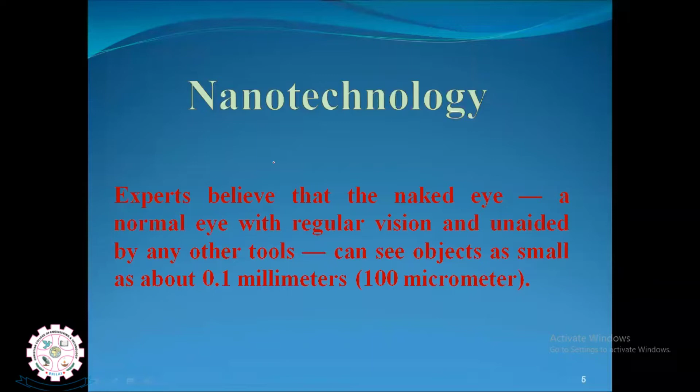We'll see the nanotechnology definitions. Nanoscience is the study of the phenomena and manipulation of materials at atomic, molecular, and macromolecular scales, where the properties differ significantly from those at a large scale. So we are manipulating material properties at these scales, where properties definitely differ compared to the large scale.

Nanotechnology is the design, characterization, production, and application of structures, devices, and systems by controlling shape and size at a nanometer scale. For any design or characterization of a product, structure, or device, we control the properties of that component by controlling its shape and size at the nanometer scale.

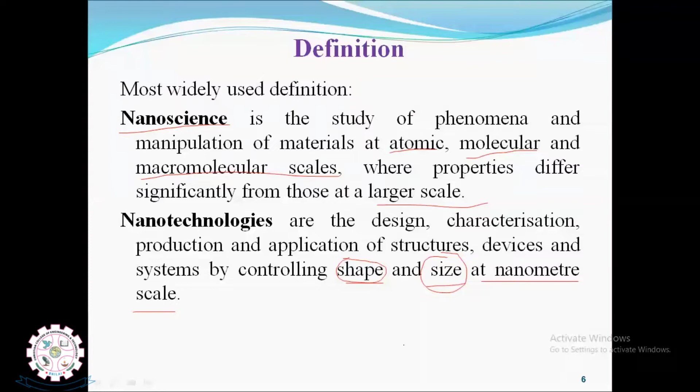So now we are able to improve the properties by double, triple, 4 times, or even 6 times. We can improve the component's properties or behavior as needed by changing the material at the macro to nano level, mainly through shape and size.

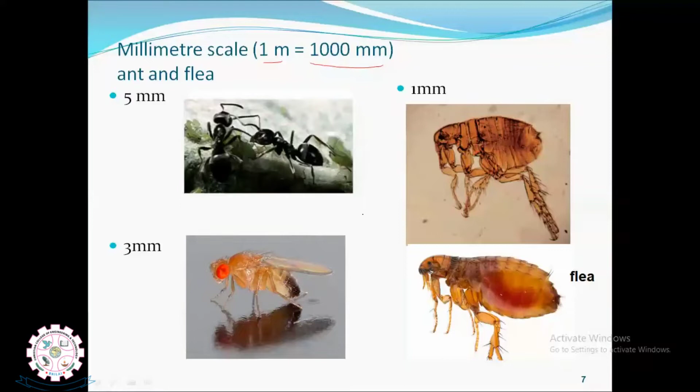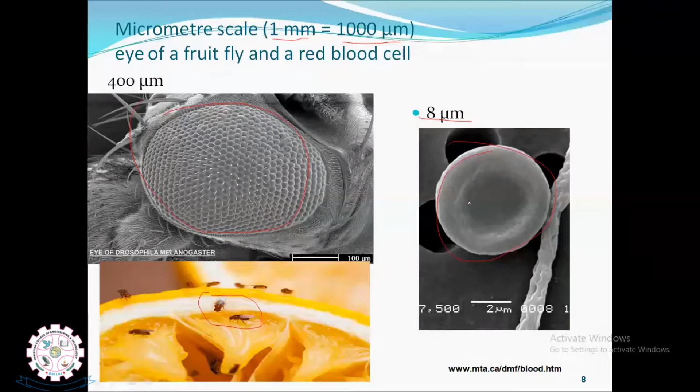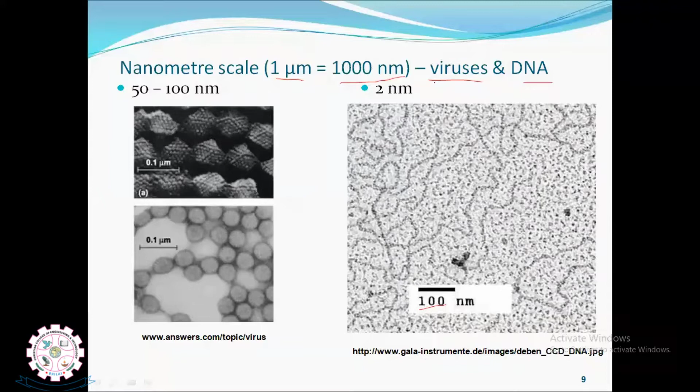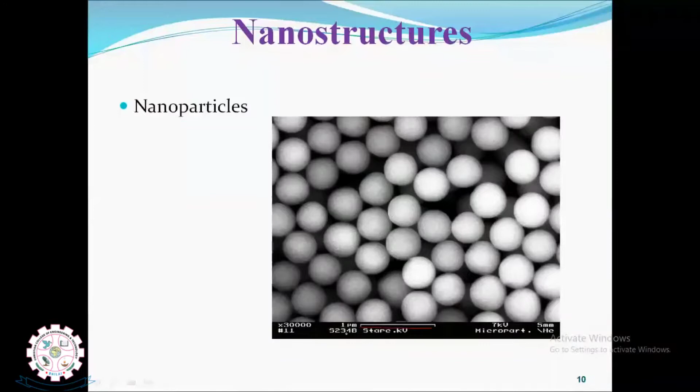These are some images of nanoparticles. Here, this dimension is 1 micron for the nanoparticle. We also know about carbon nanotubes and buckyballs, whose use is increasing a lot nowadays. These are some structures of carbon nanotubes and buckyballs.

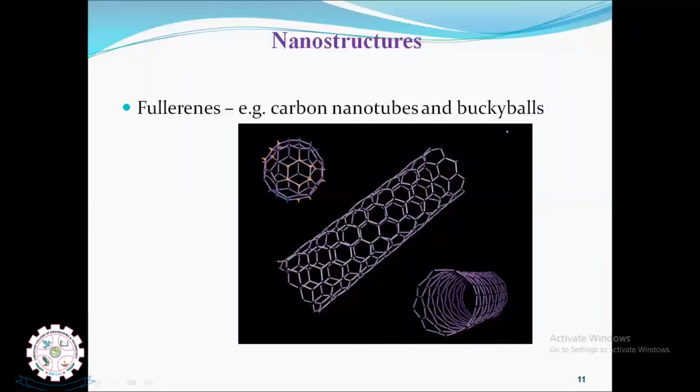For nanostructures, we know there are 1D, 2D, and 3D nanostructures. We are now able to develop these and use them especially in medical and bio applications. Recently, my brother's wife had an operation where they put a mesh inside the womb, a nanostructure type of mesh.

There were some problems, so to overcome them, they put the mesh inside the womb itself, and they said that after 1 or 2 months it would disappear automatically.

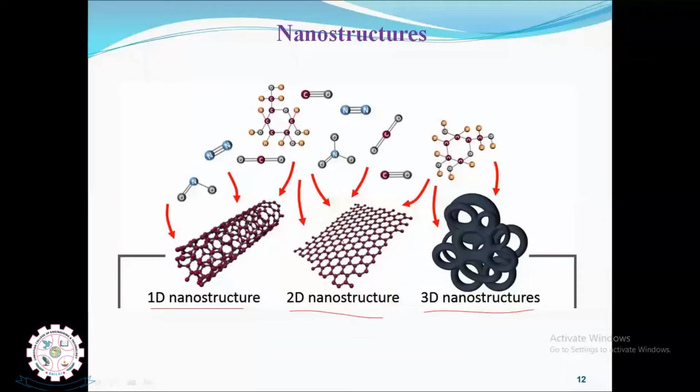So that will be decomposition into the blood, and through that blood only it will come out. So that medical applications, lot of medical applications in aerospace applications, even the automobile sectors also, we are using this nanostructures, carbon nanotubes, and nanowires, and biopolymers, and dendrimers. This all we are using in various applications, mostly in aerospace and medical applications.

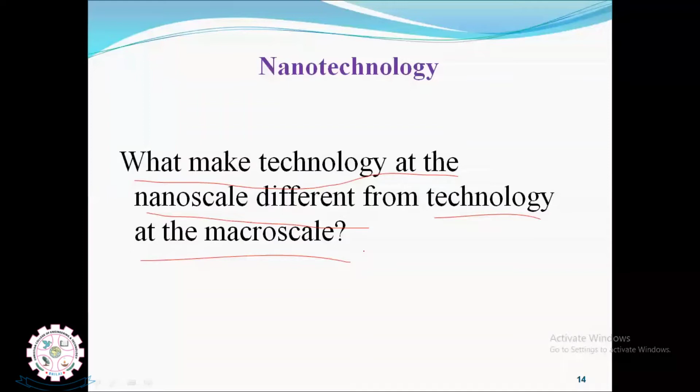So now what is nanotechnology? What makes the technology at the nanoscale differ from the technology at the macro scale? What difference can you observe in nanotechnology compared to macro scale technology? Macro scale means up to micro level, but now we are in the nanometer range. So we can observe what differences exist, that we'll see now.

Nanomaterials attract attention because of their unique physical, chemical, and mechanical properties that differ from those of bulk solids and molecules. Mechanical means tribological properties, corrosion properties come under chemical, and physical thermal properties also come under physical. All these properties of nanomaterials are unique, and they are completely different from macro level materials.

So nanomaterials exhibit distinct size dependent properties in the 1 to 100 nanometer range, where quantum phenomena are involved. What does this quantum phenomenon mean? When the particle radius approaches the asymptotic exciton Bohr radius, the influence of quantum confinement becomes apparent.

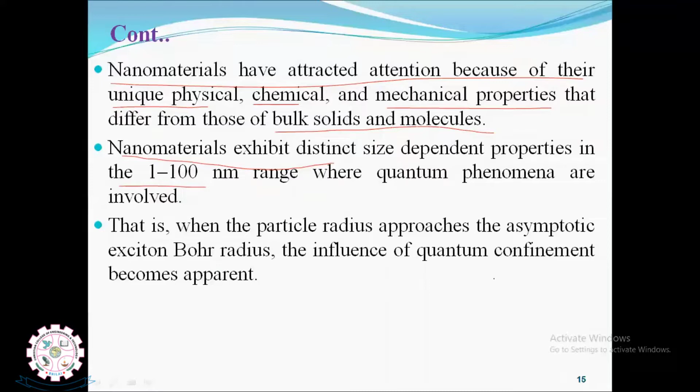Now, why is there a difference when you reduce the size of the particle? Especially in terms of strength, how does using the nanomaterial improve strength? The very large surface area of the nanomaterial is one of the reasons for their novel properties, and the high surface to volume ratio results in significant effects of the surface properties on their structures. This is the main reason, because we get a high surface to volume ratio.

Mainly the reason for the novel properties is that we get a high surface to volume ratio, resulting in significant effects of the surface properties on the structures, especially when using nanostructures. Because of that high surface to volume ratio, we get higher end properties.

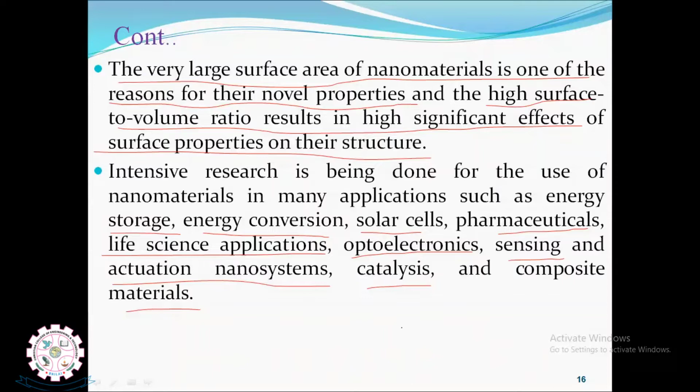Intensive research is being done for the use of nanomaterials in many applications such as energy storage, energy conversion, solar cells, pharmaceuticals, life science applications, optoelectronics, sensing and actuation nanosystems, catalysis, and composite materials. So lot of applications - we are using nanomaterials nowadays in many such areas.

The volume ratio, volume to surface ratio - for example, an object smaller in size has a much greater surface area to volume ratio. How can an object having smaller size have greater surface area to volume ratio? Let's see an example.

Take a 2 centimeter cube and a 10 centimeter cube. If you take the 2 centimeter cube, it has a surface area of 24 square centimeters and volume of 8 cubic centimeters. The ratio of surface area to volume is 24 by 8, that means 3:1. Now take the 10 centimeter cube: surface area 600 square centimeters, and volume 1000 cubic centimeters. Ratio is 0.6:1. So we get the highest surface area to volume ratio when reducing the size of the object, and because of this greater ratio, we get higher end properties.

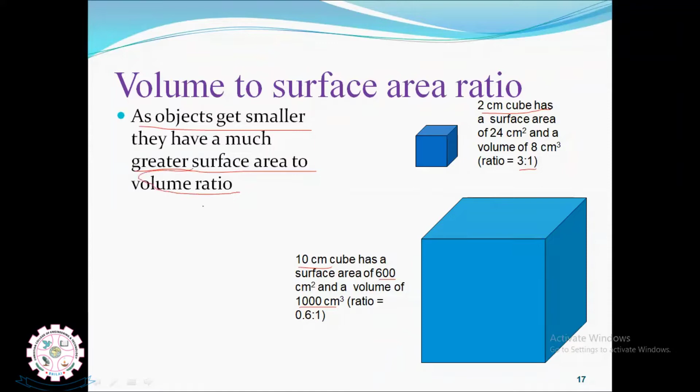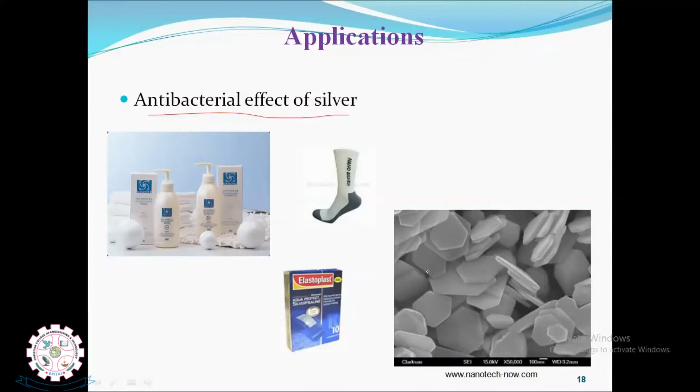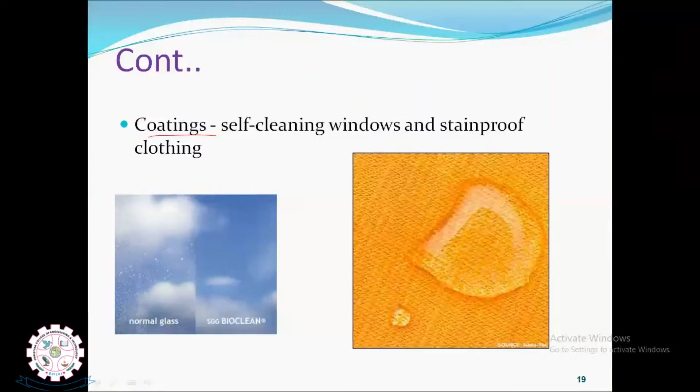You can see some applications: antibacterial effect of silver, some medical applications, and coatings. We use self-cleaning windows and stain-proof clothing with this coating, using nanomaterial coating, and microchips - we are developing microchips with the help of nanomaterials. Even our cell phone SIM cards, micro SIM cards, and sunscreens and cosmetics also use nanomaterials, and other applications like catalysts, food, nano remediation, paint, paper, cloths, filters, batteries, toothpaste, and cleaning products. Nanotechnology takes a place in many, many applications - we have it involved in almost every application.

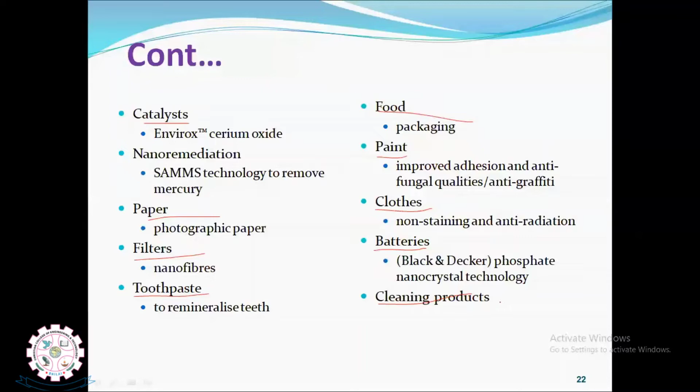Now we'll see the properties of the nanomaterials.

The practical application of engineering materials in manufacturing engineering depends upon the thorough knowledge of their particular properties under a wide range of conditions. Whatever material we want to use, we should know the behavior of the material under load, or under environmental conditions, or under external conditions - harsh environmental or chemical conditions, temperature conditions, and under external loads.

If we are able to understand properly the behavior of the material, then we can recommend that material for a particular application. So whatever the engineering application, if you want to use any material or fabricate it for any component, first we should know the behavior of the material under different conditions. This condition generally we call properties.

The term property is the qualitative or quantitative measure of the response of material to externally imposed conditions like forces and temperatures. So in terms of qualitative or quantitative measurement, we are measuring the response of the material under forces, external loads, temperature, and environmental conditions.

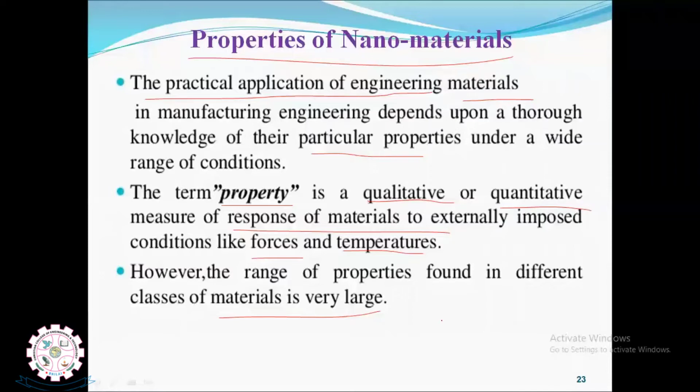When applying load, the detachment between grain bonding - bonding between atoms - may occur at low load as well. As you reduce grain size, grain boundaries increase, surface to volume ratio increases, and to detach that bonding we need to apply more load. So as you reduce the grain size of the material, you are directly improving the properties of the material.

So we know the classification of material properties. Under material properties, we know chemical properties, physical properties, mechanical properties, and dimensional properties. We'll focus on the mechanical properties.

Since the topic is mechanical behavior of the nanomaterial, chemical properties are also very important, physical properties are also very important, and dimensional size and shape are also very important. Mechanical properties are very important since we are working on materials developed for various applications - mostly strength, hardness, toughness, stiffness, elastic and plastic property, ductility, brittleness, hardness. We have to analyze all this much more for various applications.

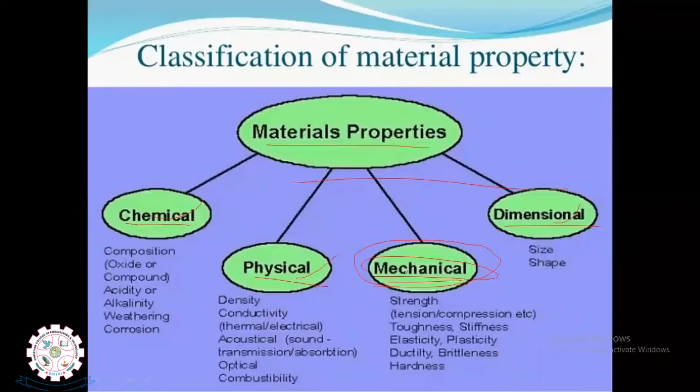So mechanical properties - the properties of material that determine its behavior under applied forces - are known as mechanical properties. At various applied external forces, the behavior of the material under external forces only, we can say, is mechanical properties.

We know that they're usually related to the elastic and plastic behavior of the material. Material may undergo elastic behavior or plastic behavior under load. These properties express the functions of stress and strain.

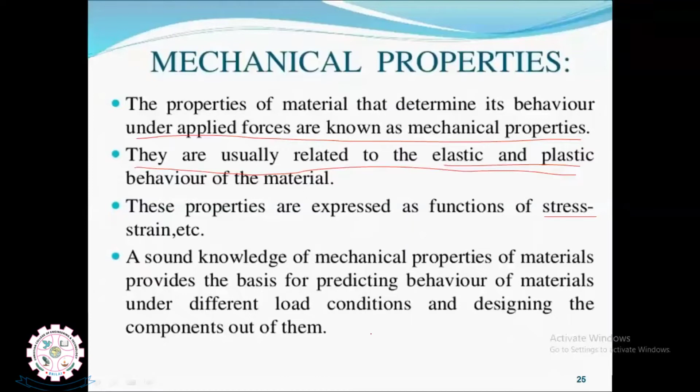A sound knowledge of mechanical properties of material provides the basis for predicting the behavior of the material under different load conditions and designing components out of them. If we have very good knowledge of the mechanical behavior of the material under various conditions and loads, then you can design or recommend that material for whatever applications.

So mainly stress and strain. Experience shows that a material subjected to load may either deform, yield, or break, depending upon the magnitude of the load, the nature of the material, and the cross-section dimensions. These are the main three effects on how material will behave under external loads and forces.

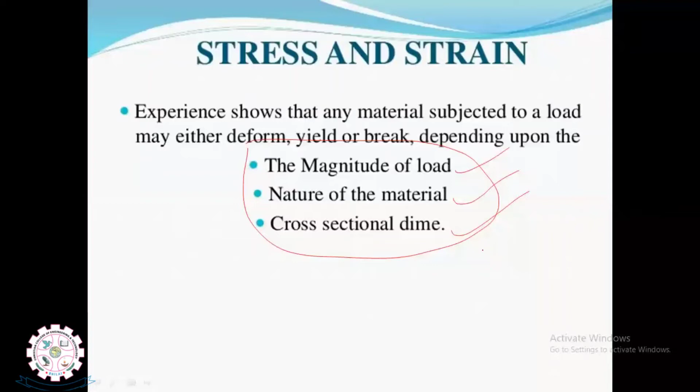If you see the length scale wise material behavior, take meters, millimeters, microns, and nanometers. The behavior under load means how defects and cracks form, how material will break. We take jet engines as an example, 1 meter macro structure, down to 10 power minus 2 to 1 meter, that behavior of the material. When you analyze at this range, you can understand the different nature of that material.

When you come to microns, here you can see the micro machines. If you analyze the material at a micron level, then you will get a different idea, and if you analyze at nanometers, you will get a different idea again.

You can see the crack in the human teeth at 1 micron. Generally we won't observe this type of crack. Even with jet engines, if micro cracks occur, that leads to huge damage. These micro cracks generally cannot be observed by the naked eye. With the help of SEM analysis or optical images, we are able to observe the micro cracks.

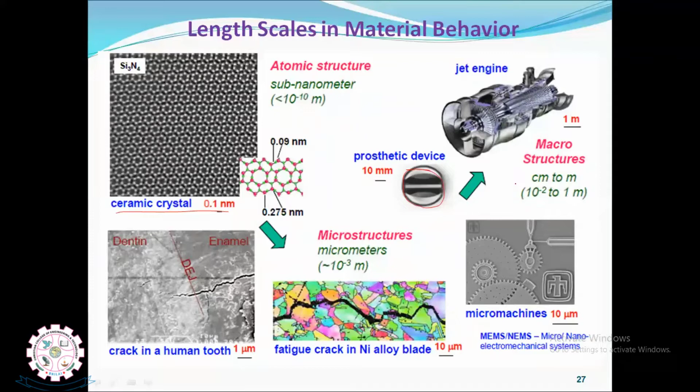How does material get failed? We know that it can be by plastic deformation or yielding, by fracture, by fatigue, by environmental conditions, by corrosion, or by wear surface damages.

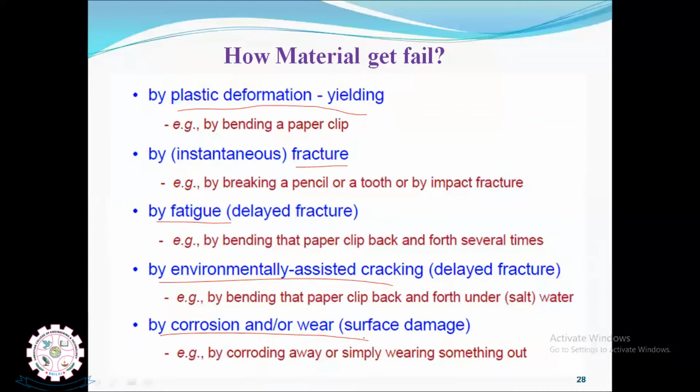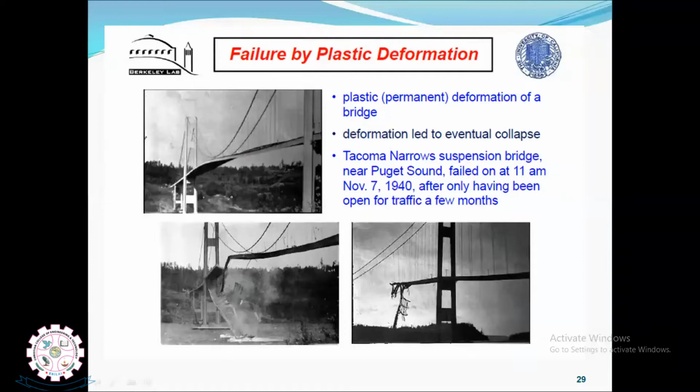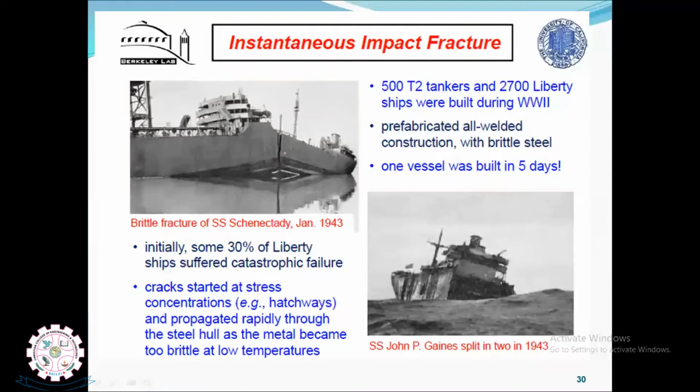We can see failure by plastic deformation. Because of plastic deformation, bridges may collapse. And under impact load, the T2 tankers and 2700 Liberty ships built during the Second World War also suffered breakage because of the impact factor, sudden load. If the material is not able to withstand the impact load, then sudden break factors lead to huge damage.

At the same time, fatigue fracture: the de Havilland, the first commercial jet aircraft, had 5 major crashes in the 1952-54 period, caused by fatigue cracks initiated at the square windows. That's why now you can see flights only use oval shaped windows.

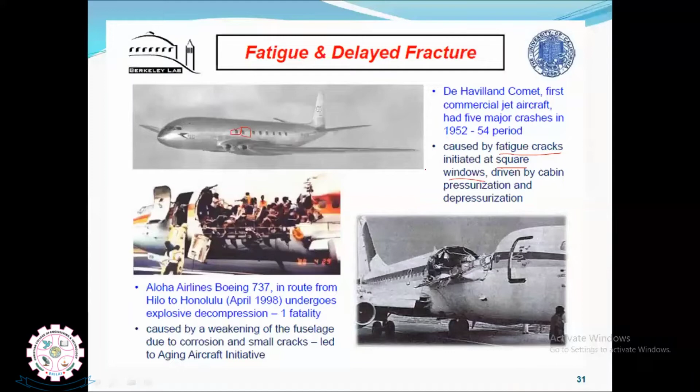So with fatigue load, if we are not able to design properly, if we are not able to use the proper material for the particular external force acting, then it may start as a small crack or small damage, but it leads to huge failure.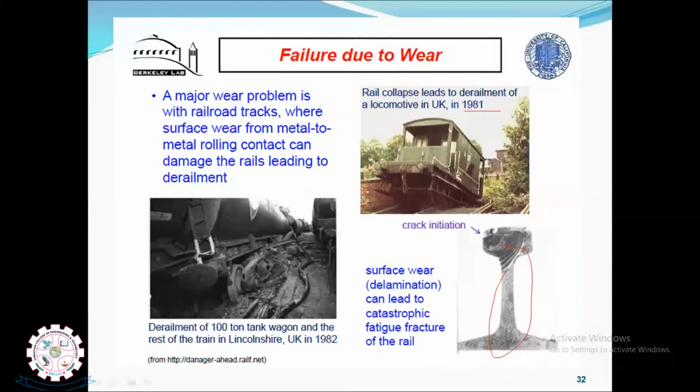So if you understand how material will behave under different loads, how material will fracture or fail under different conditions, you can analyze and overcome these difficulties. We can try to overcome them with the help of nanotechnology, maybe coating, nano coating.

For example, in rail we cannot use high wear resistant material because iron is the economical material available. If you want to use ceramic, titanium, or platinum, which are high wear resistant materials, the cost is very high. You cannot invest that much and put the rails.

So iron is the economical material we use. With the help of nanotechnology, to improve wear resistance and surface property, we are able to apply coating with nanomaterial, and the coating cost is very low. That's why nanotechnology is now a very useful tool to overcome these problems. Instead of increasing cost, with nanotechnology we are reducing the cost, staying at an economical level while overcoming all the problems.

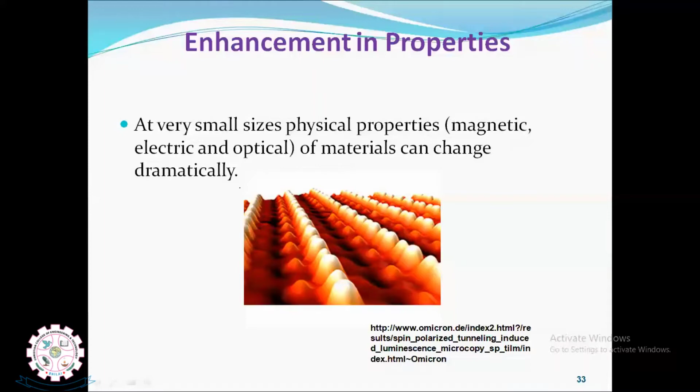At a very small size, physical and other properties of the material can change dramatically. Nanomaterial can be used to improve or change the properties of some products, alloys, and composite materials.

For example, in aluminum composite, when you add silicon carbide particles at macro level, micro level, or nano level into aluminum, compared to the base aluminum material, there is definitely some enhancement in properties. But when you compare macro particles and nanoparticles...

Many researchers have already published papers stating that when they added nanoparticles into aluminum composite material, the properties of aluminum enhanced more compared to when they added micro particles.

For example, in the work by Y. Şahin and K.E. Öksüz, they published a paper on the effect of aluminum oxide nanopowder on the wear behavior of nickel titanium shape memory alloys. They prepared the nickel titanium based shape memory alloy and developed a composite material using Al2O3 aluminum oxide nanoparticles by powder metallurgy method.

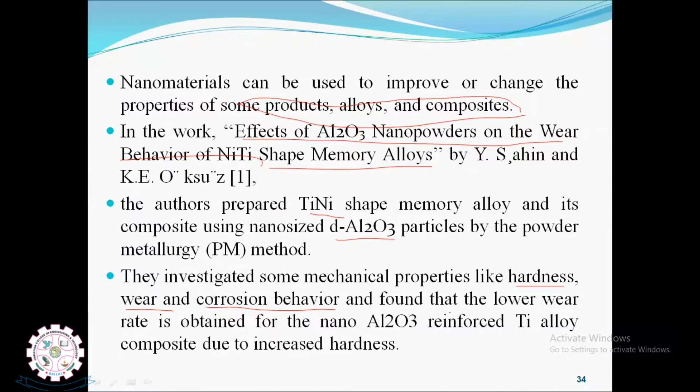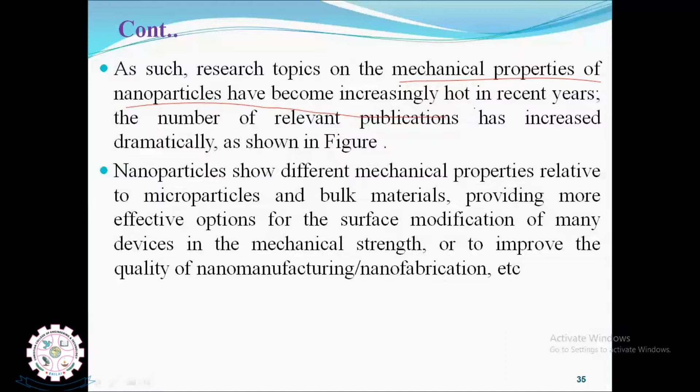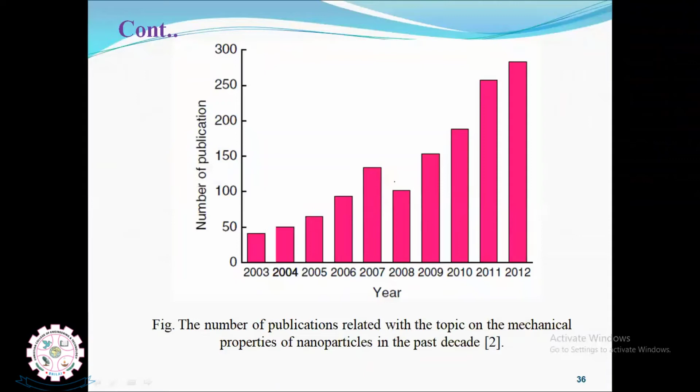Yes, mechanical properties of nanoparticles have become an increasingly hot research topic in recent years. A lot of papers are published now. From 2003 to 2012, nearly 300 papers were published related to nanomaterial. Now yearly they are publishing more than 500 papers, even more than 1,000 in some cases, throughout the world.

That means many people are working in nanomaterial research. It's a very good research area. You can publish papers, get patents, and get funded projects. We also recently got one funded project.

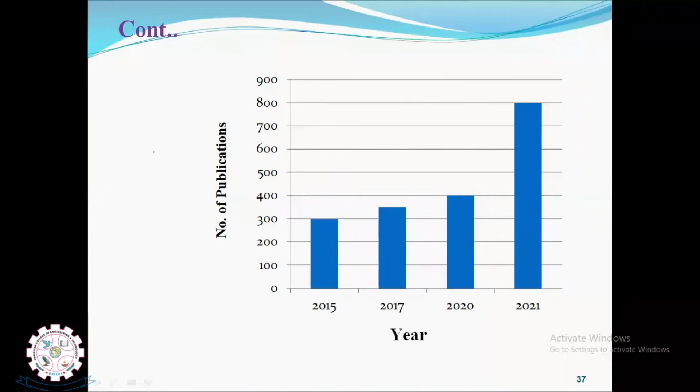We are also adapting nanotechnology to develop bus stops for elderly people. We recently got nearly 25 lakhs as a funded project from the DST. So we can see that some of the research...

Donanta fabricated aluminum composite reinforced with silicon carbide particles, nano silicon carbide particles. He incorporated micro silicon particles and nano silicon particles into aluminum by stir casting method, and observed that when they incorporated the nano silicon particle, they got better properties of the aluminum composite material.

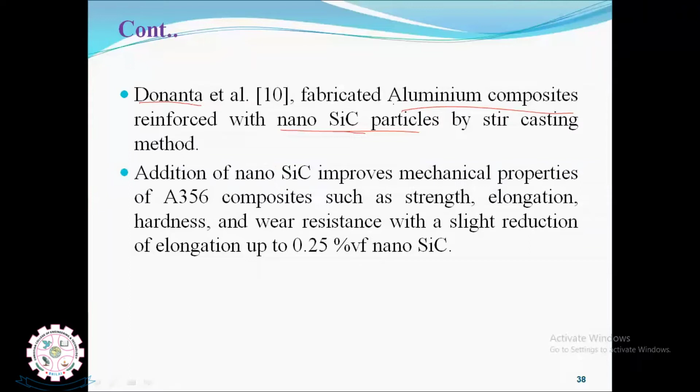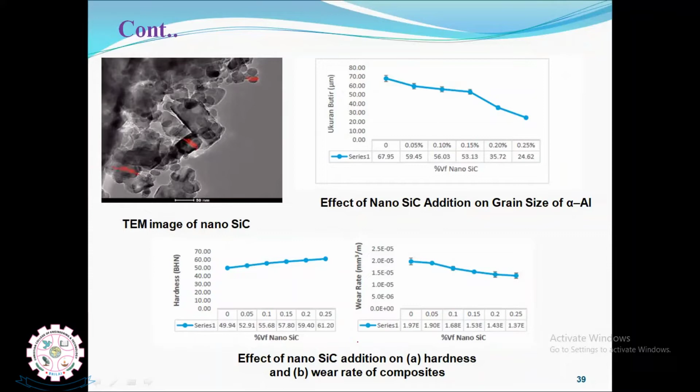Now we'll see how we can characterize the nanoparticles, nanomaterials. We have different techniques to analyze nanomaterials, because with our own eye we cannot see the nanomaterial. So we have different equipment to analyze the nanomaterials.

Electron microscopy, then scanning probe microscopy, especially atomic force microscopy, and X-ray diffraction, and neutron diffraction, and X-ray scattering, and X-ray fluorescence and spectrometry, and acoustic wave technique, and contact angle measurement, and various spectroscopies. So these are the equipments available nowadays to analyze nanomaterial characteristics, the metallurgical analysis of nanomaterials.

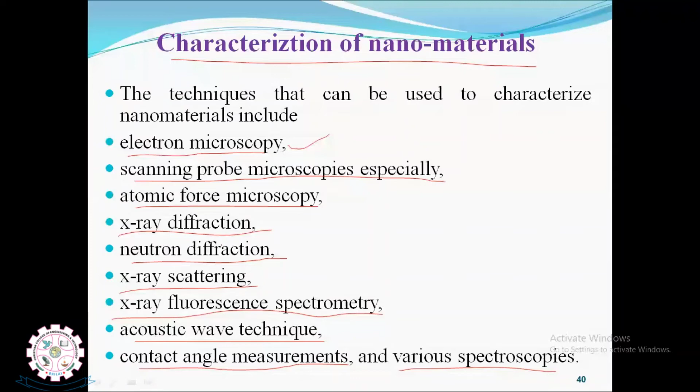So many articles, many papers have been published. They have analyzed the structure of the nanoparticles by using any one of this equipment, and they have analyzed the nanoparticles, nanomaterials, and their metallurgical behavior.

One is the atomic force microscope, one of the powerful techniques that can be used to obtain both high resolution images on many kinds of solid surfaces, and the vertical forces as well as the lateral forces between the sharp tip and the surfaces. So one of the equipment we have, the atomic force microscope, is a powerful equipment.

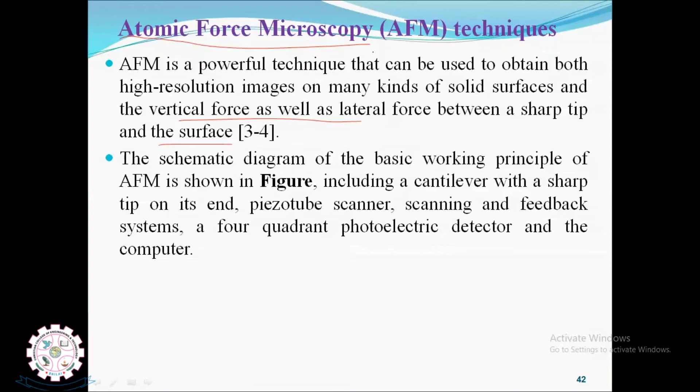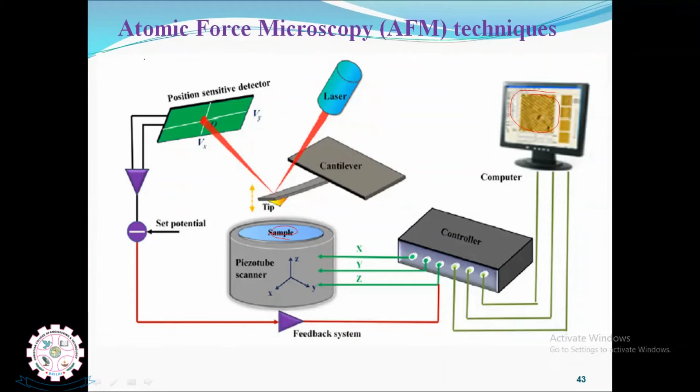With this equipment we can place the sample, and we apply laser beams, which reflect with the help of sensing detectors, and we get the final image. So with the help of atomic force microscopy, we can analyze the structure, and what elements are induced in that material. The nanomaterial structure we are able to understand very clearly with the help of atomic force microscopy.

Now other techniques: RBS, Rutherford backscattering, we utilize Rutherford backscattering for quantitative and qualitative element analysis. Then SANS, small angle neutron scattering, that's one technique. Then surface characterization and nuclear reaction analysis, that is NRA.

With the help of this technique, you can understand the depth profiling of solid thin films. And RS, Raman spectroscopy, you can do vibration analysis inside the material. Then XRD, X-ray diffraction, for crystal structure, we can observe how the crystal structure is arranged. Then EDX, energy dispersive X-ray spectroscopy.

With the help of that, element analysis shows what elements are there. With the help of EDX, we can analyze what is the weight percentage of a particular element. For example, aluminum, what is the weight percentage of aluminum? If iron is there, what is its weight percentage? What elements are there, and what is the weight percentage of each element, we can also analyze.

Then SAXS, small angle X-ray scattering, with the help of surface analysis, particle size can be measured from 1 to 100 nanometers. Then CLS, cathodoluminescence, with the help of that we can analyze characteristic emissions. Then NMR, nuclear magnetic resonance spectroscopy, helps analyze the odd number of nuclear species.

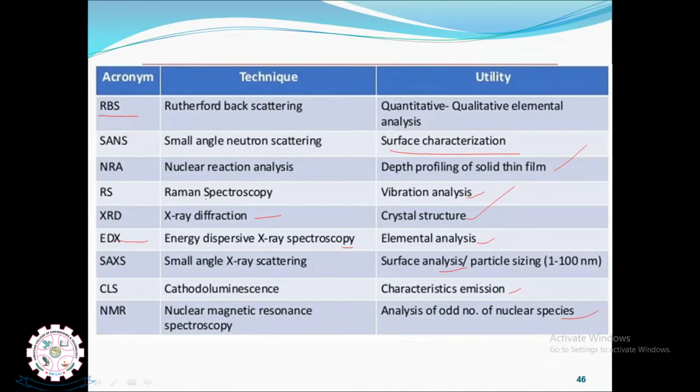So we have different techniques nowadays available to analyze nanomaterials, to completely understand the nanomaterial, so that we can use it in various applications. Mostly nowadays we are using nanomaterials. Because of nanotechnology, we now use a greater percentage in medical and aerospace fields. On the medical side, a lot of changes have occurred because of nanotechnology.

Then structural characterization and compositional characterization, so we can divide into two: structural characterization of the nanomaterial and compositional characterization of the nanomaterial. Structural means we can use SEM, TEM, STM, AFM, and HRTEM. These are all structural applications, structural analysis.

Then composition characterization, mass spectroscopy, that is bulk composition, and AES, XPS, SIMS, and XRF. These are all composition analysis techniques, showing what elements are there.

We can analyze what weight percentage of an element is present using all types of equipment, and we can analyze the structural characterization using SEM, TEM, and all the remaining techniques.

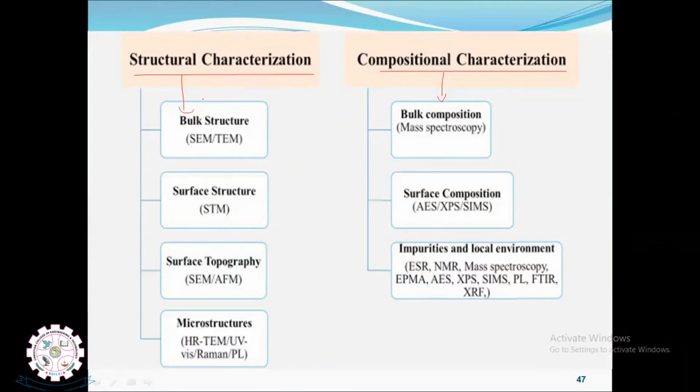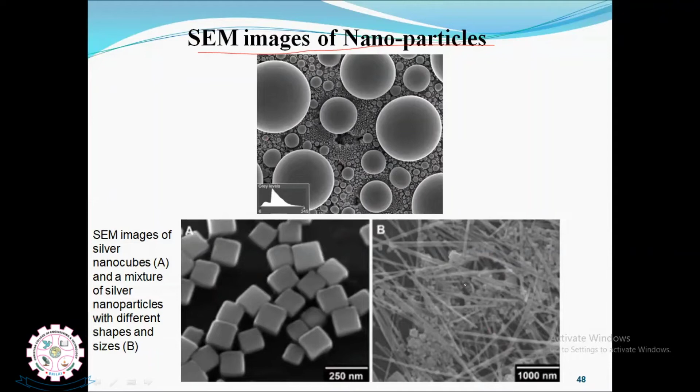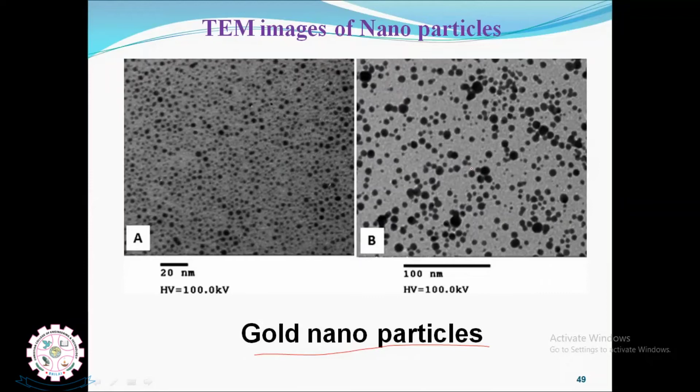Why is there so much interest and concern about nanotechnology at present? Because it has enormous potential. It's a very good, means potential technology, and also there are huge gaps in the knowledge concerning the possible risk.

Still a lot of research is going on. That's why there's lot of interest, lot of people are working in this area, and many people are publishing, because lot of gaps are still there.

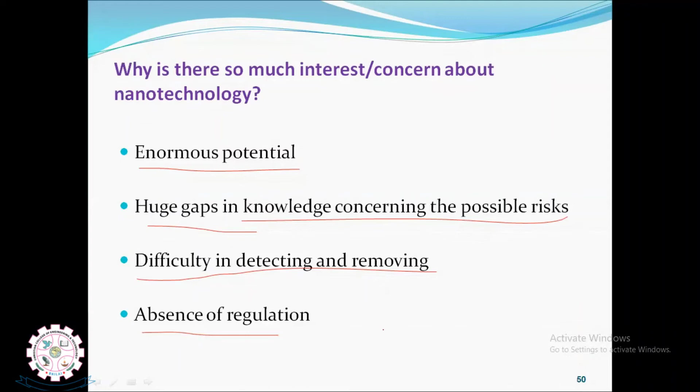Difficulty in detecting and removing - it is very difficult to detect and remove, so research is still going on for detecting and removing. Absence of regulations - because of the absence of regulations, there's also a lot of interest and concern in nanotechnology.

And potential risks associated with nanotechnology. What are the potential risks associated with nanotechnology? We can see adverse health effects in humans and adverse effects on the environment from deliberate or accidental exposures.

If accidentally exposed or deliberately exposed - now we are suffering all over the world because of COVID. The size of the virus is something we are unable to see, it's a nanometer size. Maybe it came out accidentally or was sent out deliberately, we don't know exactly, but now we are suffering because of that. Still, how to control it, because we cannot see nano with our own eyes.

Accidentally exposing or deliberately exposing creates a lot of problems, leading to huge damage, even in terms of human death, in terms of machinery damages, whatever it may be. That's why a lot of research is still going on, since we are unable to see at the nano level, whatever it may be in terms of material or virus.

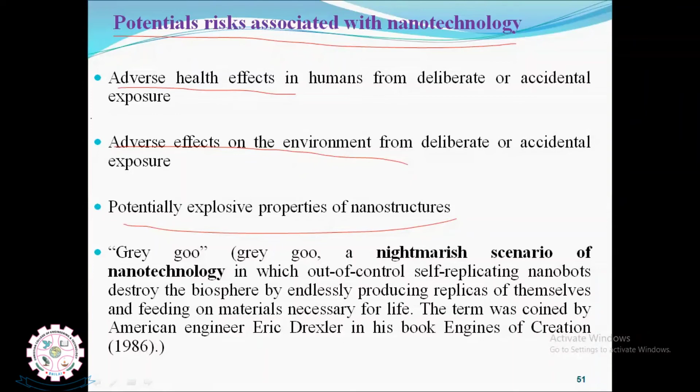Then there are potentially explosive properties of the nanostructure. And there is the nightmarish scenario of nanotechnology, in which, out of control, self-replicating nanobots destroy the biosphere by endlessly producing replicas of themselves and feeding on the material necessary for life. These are some potential risks involved in nanotechnology.

Risk assessment problems - very difficult to detect without sophisticated equipment. Nanotechnology is very good for our daily applications, to make things easy, but there are a lot of problems too, to detect or identify - without sophisticated equipment it is not possible at all. Only with sophisticated equipment is it possible.

It's also difficult to predict how particles will behave in different environments. And the small size may result in particles passing into the body more easily, because it's nano level. These difficulties are there, which may cause huge damage.

Because of the high surface to volume ratio, the reactivity is more, and there's potential to adsorb toxic chemicals. These are some research areas, gaps are there, we can work on this, and try to reduce or overcome all these problems.

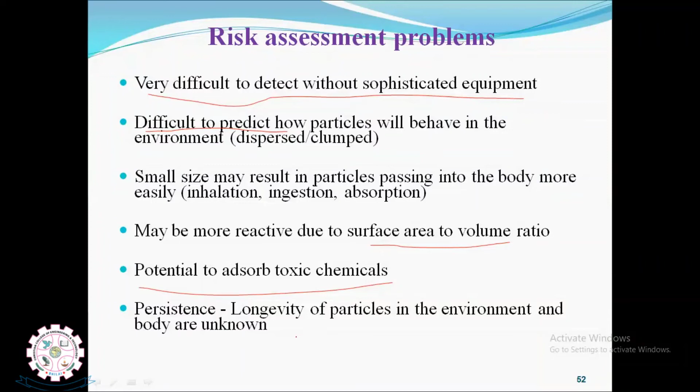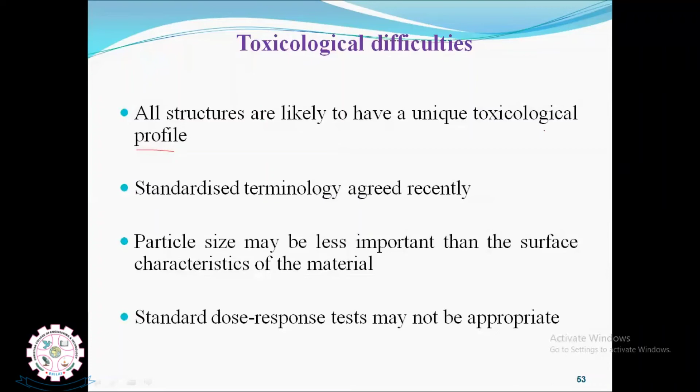Persistence and longevity of particles in the environment and body are unknown. A lot of particles are there in the environment and in our body which are unknown to us. Then toxicological difficulties: all structures are likely to have a unique toxicological profile, and standardized terminology was agreed recently. Particle size may be less important than the surface characteristics of the material, and standard dose-response tests may not be appropriate. So these are some toxicological difficulties around us.

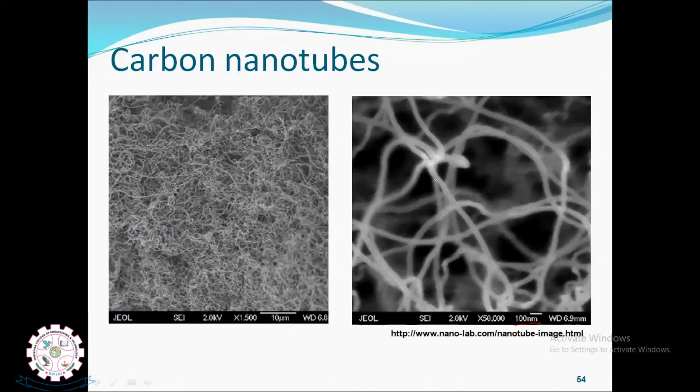If you take the carbon nanotube, finally I'll conclude with carbon nanotubes. The structure is like this. If you go up to 100 nanometers, with the help of the scanning electron microscope, we can see the carbon nanotubes. Carbon nanotubes are commercially produced by companies such as Thomas Swan. They are able to produce and develop better, more desirable products.

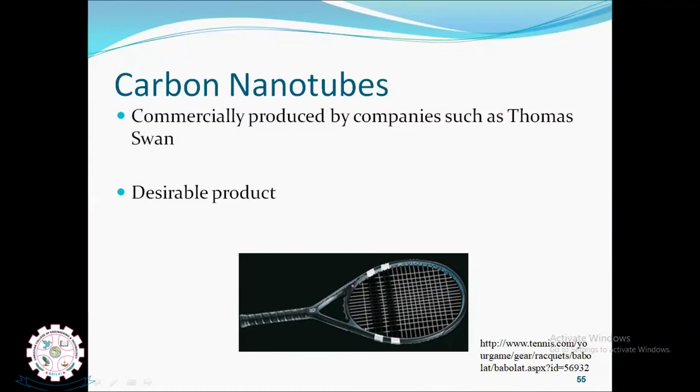For example, a shuttle bat made with the help of carbon nanotubes has high strength. Potential applications of carbon nanotubes include material chemistry, electronics and ICT, medicines and life sciences, and energy storage or energy transfer, such as hydrogen storage, super capacitors, solar cells, fuel cells, and superconductivity materials. We are developing these with the help of carbon nanotubes.

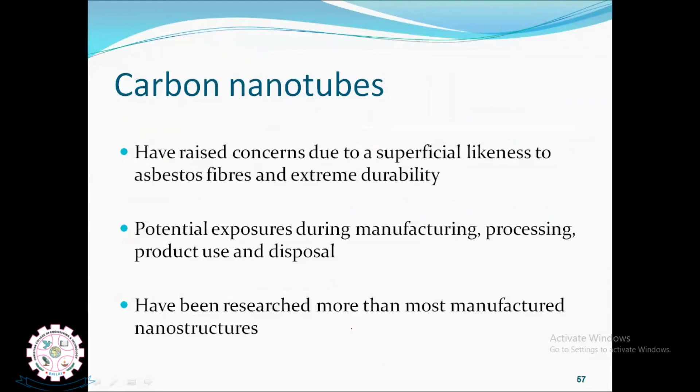Carbon nanotubes have raised concern due to their superficial likeness to asbestos fibers and extreme durability. Potential exposures during manufacturing, processing, product use, and disposal have been researched more than most manufactured nanostructures. So these are some research gaps around carbon nanotubes.

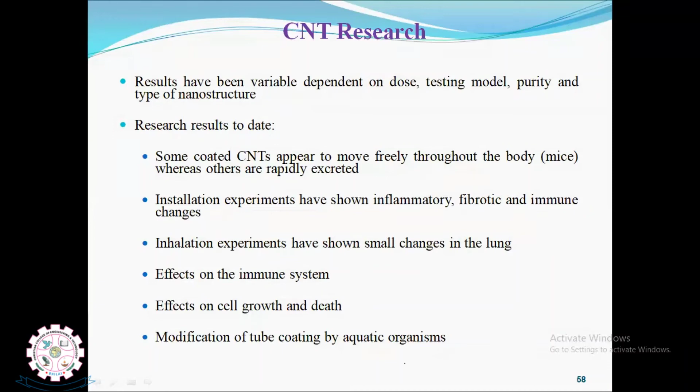You can go, if you are interested, take these areas and do research. You can publish easily, get patents, and easily get funded projects also. These are some research gaps, because nanomaterials are unable to be seen directly, there are a lot of problems but also a lot of advantages and uses. So if you are interested, take up all these problems as research areas and try to give solutions useful to humans.